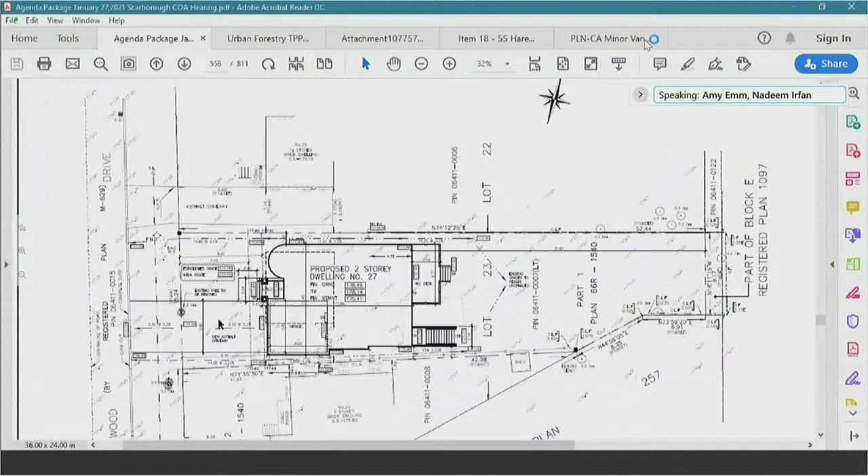Just zoom in the front porch area. Madam Chair, for item number 1, which is the balcony area, the permitted is 4 square meters, and we are proposing 5.95. I wanted to mention we have a ground floor porch, and the balcony is actually located right above it. So the additional square meter is based on the front porch.

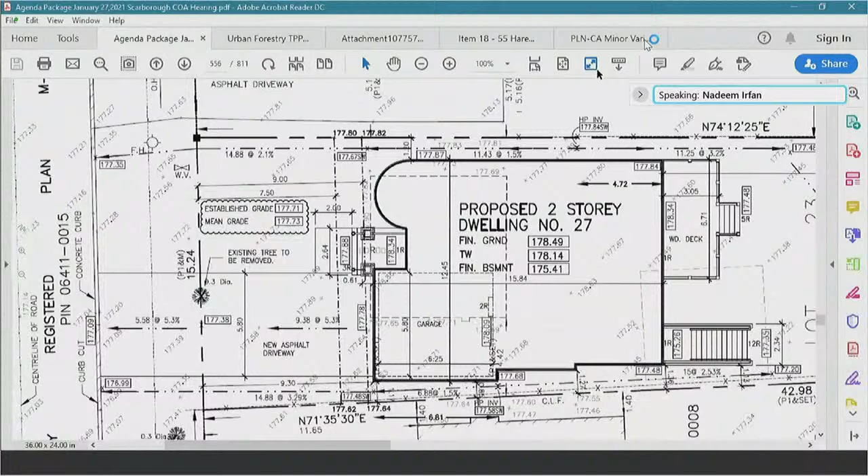We believe this is minor in nature and should be considered for approval. Item number 2 and 3 pertain to height. It was not our intention to request for the height. I think it's just 9.01 if we look at the front elevation, and 9.07. It's the way the zoning examiner interpreted it and listed as 2 variances. We believe these are very, very minor in nature and should be considered for approval.

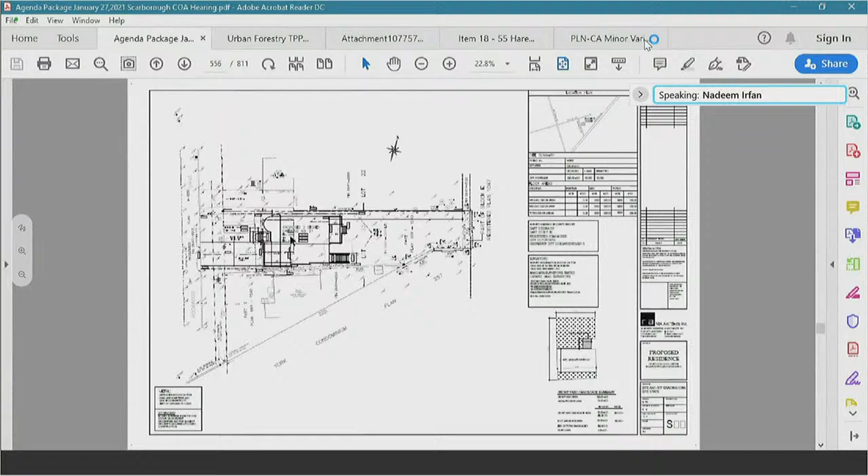Coming to the variance number 3, side yard. I wanted to go back to the site plan and zoom into the southwest corner of the garage, a little bit more, if possible. The dimension there is 1.17. The requirement is 1.2 meter.

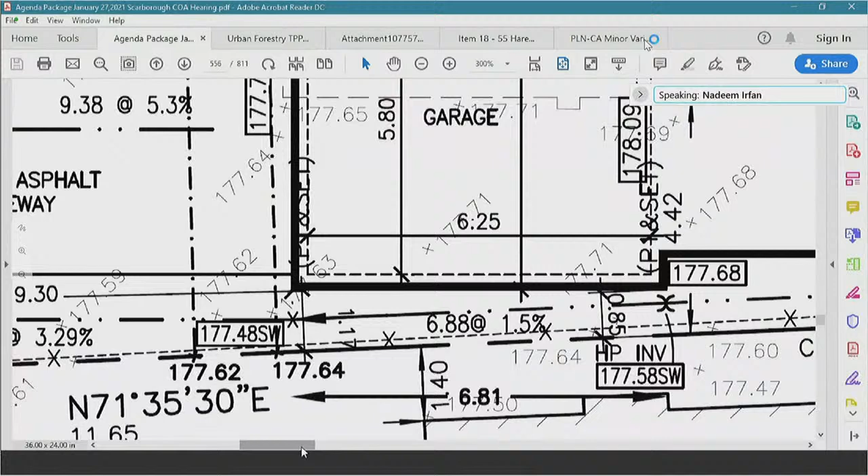The 0.85 is only at the corner of the property. If I may say, for the bylaw, exception 190 allows the garage to be built at 0.3 meter from the side lot line. So the ground floor complies or actually exceeds the bylaw requirement. We could build this wall at 0.3 meter from the property line, southern property line, and would comply with the bylaw requirement.

It is the second floor wall, which is only the back portion, that has the 0.85 meter setback. At the front, it's 1.17, half an inch, 1.25 inch shy of the bylaw requirement. If we were to stand in front of the house, the front wall on the north side will have 1.2 meter, and the front wall from the southern property line will have 1.17 meter. So it's basically negligible. The only portion, because the property line is angled, the second floor wall needs the variance of 0.35 meter. We believe that this is very minor in nature and should be considered for approval.

Going forward, item number 4 for FSI: the permitted is 0.4 times the lot area, and the proposed is 0.43. It's about 22 square meters, 22.8. If we divide the floor area into 2 levels, ground floor and second floor, it's 11.4. There is no variance for the coverage. There is no variance for the front yard.

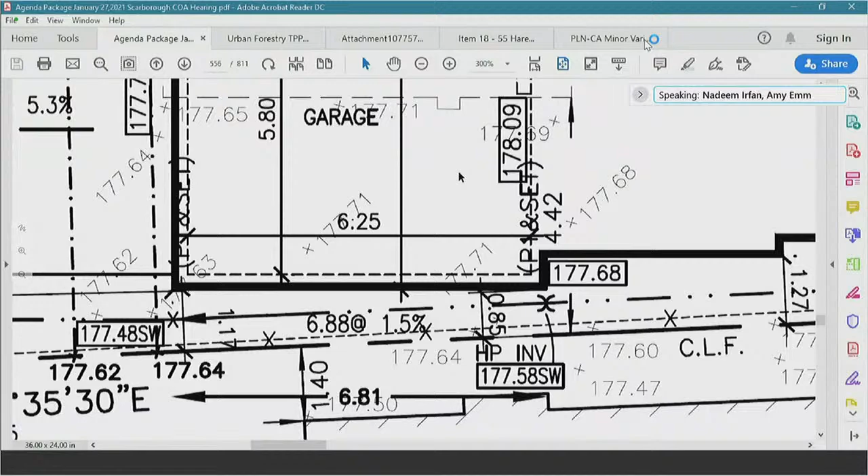Community planning staff have reviewed this application. They have no comments. Therefore, we request the committee to consider this for approval. And we conclude our presentation and open for any questions from the members.

Thank you, Nadeem, very helpful. Before I open it to the rest of my committee members, I recognize what you're saying about the side yard setback. My question is, if the committee chooses to approve a reduced side yard setback to 0.8, would you be agreeable for us to tie it to the site plan, to ensure that you're only putting that 0.8 relief where you have the garage component, and that you will not be expanding the rest of the dwelling to that 0.8? Would you be agreeable to that? Absolutely. Okay, thank you. Does anybody else on the committee have questions for Nadeem?

I see Mr. Saeed has his hand up. Go ahead, Muhammad.

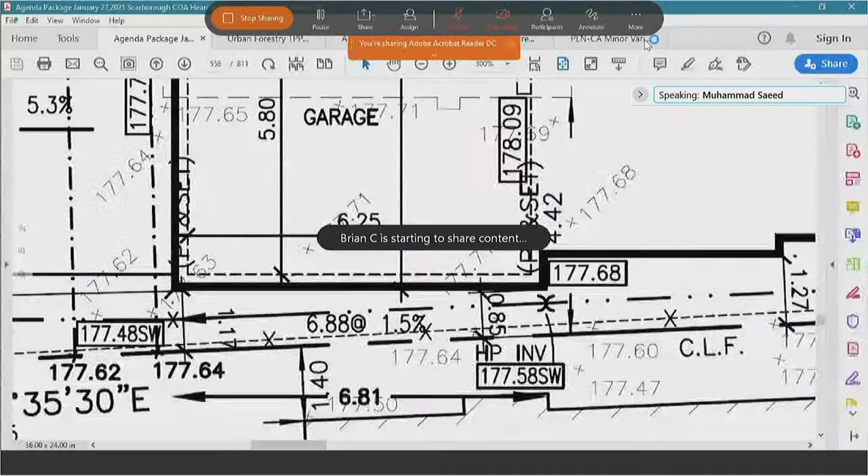Thank you, Madam Chair. Mr. Nadeem, this is just a clarification question - I could not follow you in the very beginning, I was looking at my notes. My question is about variance number 1. I just got your point that you were saying it's exceeding 4 square meters, almost 5.95, by 2 square meters. The reason you were giving was that there is a porch, and I think you told it's exactly the same size built over the porch, the second story. So, am I right on that?

Yes. Okay, so follow-up question - will there be a way to reduce this to the allowed limit, because it could raise some observations from the neighbors, like a privacy issue?

It can be reduced by just moving the front railing a little bit back, and it'll still serve as a balcony. But I'm not sure what we are going to achieve with that, because the main issue of privacy will still be there. Perhaps privacy is usually considered more in the backyard. That's why we decided to put the balcony at the front rather than at the back of the property, which is considered private area.

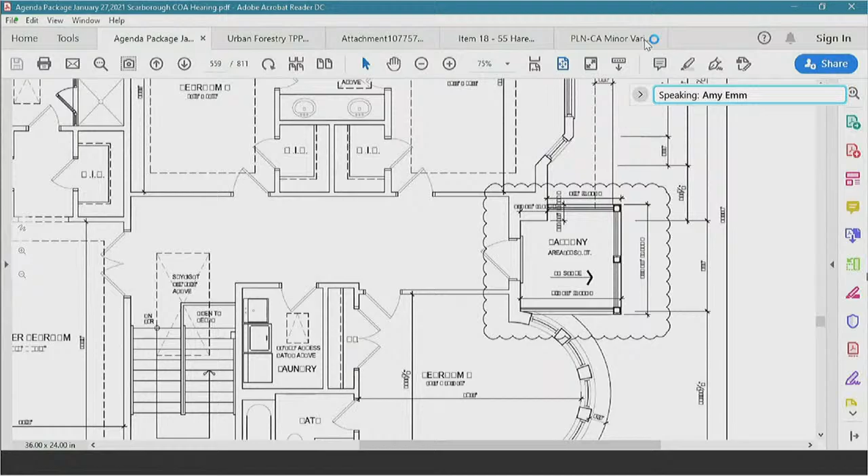Thank you very much. Thank you, Madam. If there's no other questions from the members for Nadeem, I'm going to move forward to opening the floor to the first public individual. Is there any further questions from Member Macaulay or Member McCaig? Okay, great. So Tom, please feel free to state your case, you have 5 minutes please.

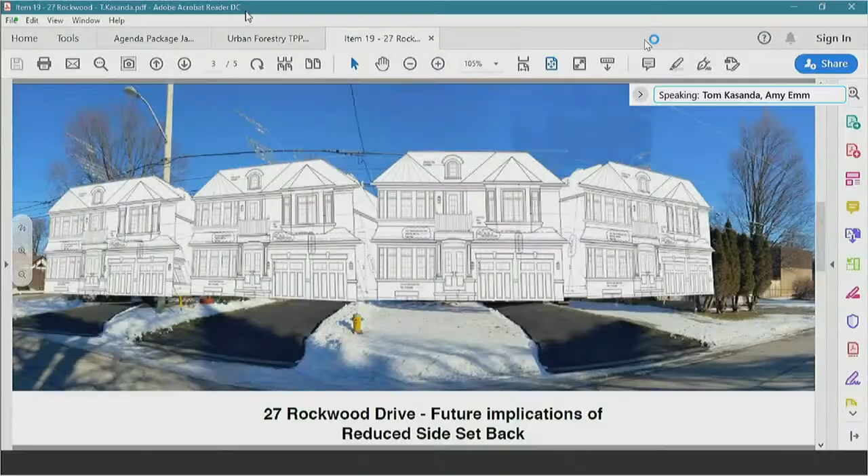Thank you, Tom. Does any member of committee have further questions for Tom? Okay, I see none. Let's move on to Suzanne, please.

Oh, hi. Yes, I'm just here because I'm a member of the Board of Directors for the York Condo Corporation, 257, and we share our back fence with 27 Rockwood. So our main concern was basically if they were going to be making any changes to the fence. And I'm not sure with the forestry what tree they were going to cut down, if it was the one in the front or the one in the back, because the tree in the back is extremely large and it has broken and fallen onto our property. So that was our concern, if they had any plans on removing the massive branches that have fallen onto our property.

Thank you, Suzanne. I'm going to defer your question to the applicant, Nadeem. Can you please address Suzanne's inquiry about the rear yard condition of the fence as well as the trees? It is not our intention to remove any trees other than the one at the front, just to make room for a car driveway. But at the back, I can inform the owners to clean up the broken tree branches.

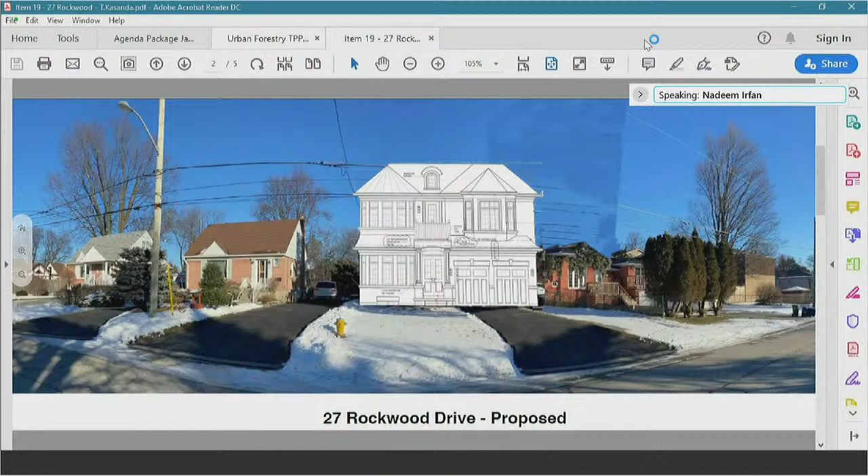Through the chair, do you wish to add anything? No, I think that addresses it. I don't see anything further unless we want to take it into committee.

Okay, so let's take this into committee then. Thank you everybody for contributing your comments.

Hi, Anne. Yes, you're still on mute. Thank you. I have moved my computer around so that I don't have as much of a background. Too much sun coming into my office, which is causing us problems in the morning.

However, the item I wanted to address now is to point out to the resident who had a concern that there is a condition of approval, which is submission of a complete application for a permit to injure or remove privately owned trees as per the City of Toronto Municipal Code. So in approval of this application and getting a building permit, the applicant will have to address both trees, the one in the front and the one in the rear. Hopefully that would resolve some of their issues. That's all my comments.

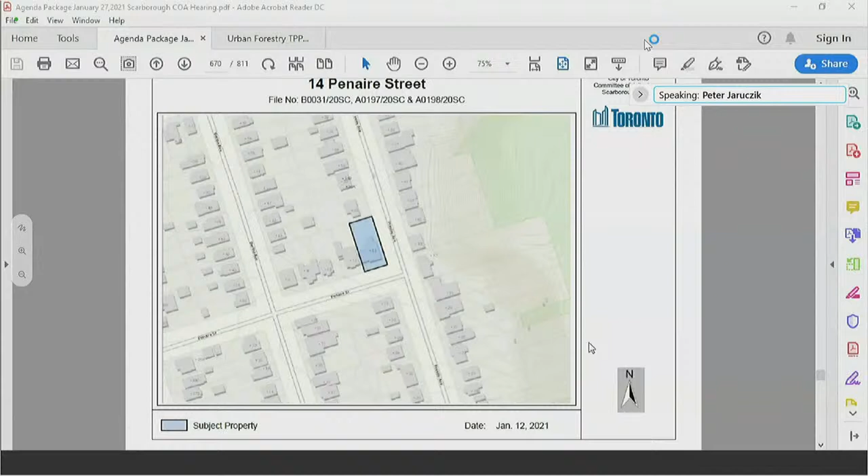The interesting thing about Penaire Street is we have 5 lots fronting onto Penaire in that lot fabric. The road to the north is Florence, with 6 lots fronting Florence. A street down, Dawnside, there are 6 lots fronting Dawnside in that same width of property. So it's my opinion this will not disrupt or take away the character of the community, as many of the lots follow this pattern.

So as we see here, Dawnside has 5 lots across, and across the street from those 5 lots are the ones severed at 25-foot lots. So when you look at the parcel fabric, there's already 5 lots previously approved there. We're in an area where Penaire has 5 lots, and on Florence, following that same pattern, we're again at 6 lots.

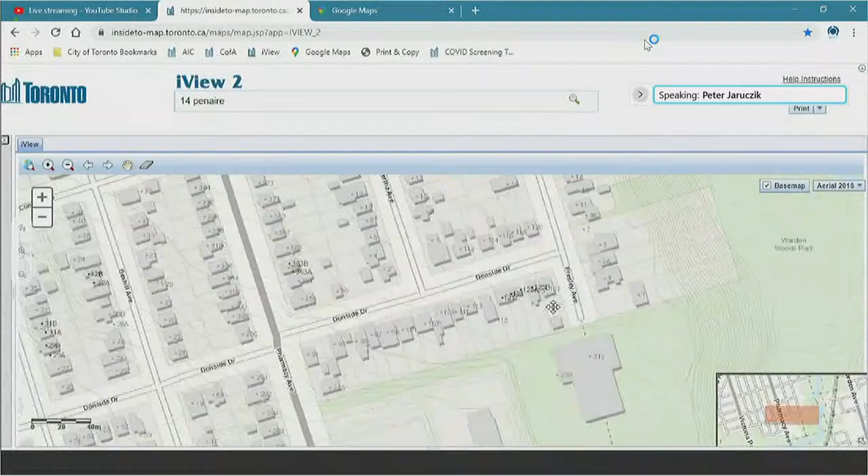What I want to end with is the last TLAB meeting regarding 50 Presley, just north of us. The member of TLAB concluded that only 3% of the houses in the study area will be candidates for severance, because the majority of the lots in the area are too small to produce two lots in the 25-foot range. Peter attested that it's about 9 to 10 lots in this neighborhood that are large enough to create these larger 25-foot severed lots.

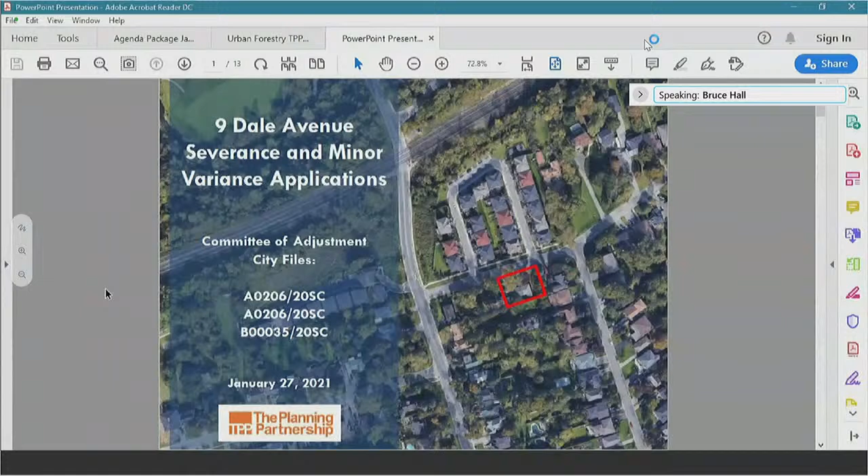My name is Bruce Hall. I'm a partner with the Planning Partnership, and I act on behalf of the owners of this property for these applications, a consent and 2 minor variances. Next slide please. Just to briefly fix you, we are north and east of Scarborough Golf Club Road in Scarborough Village, and south of the GO tracks. Largely a single family area, but as you can see, there is some intensification occurring in a few select projects. Next slide please.

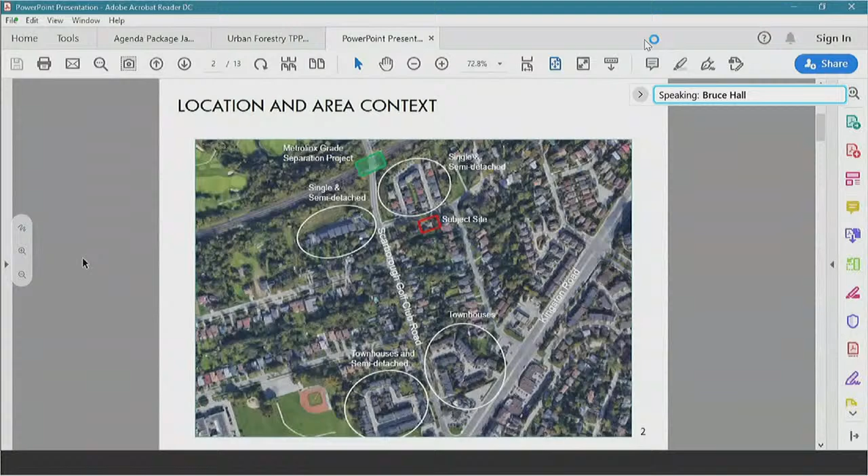Just in terms of some of the emerging context and character in the neighborhood, there's been a few things that have happened here over the last few years. There's some infill projects, townhouse on the west side of Scarborough Golf Club Road, and a semi and single detached development on a condominium road across the street. And as well, there's a grade separation project that Metrolinx is undertaking to rid Scarborough Golf Club Road of the level crossing.

Here's the existing site. I call it a wide shallow. It is 32 meters wide, 105 feet by about 21.4 meters. It has an existing single detached bungalow, which sits between 3 and 6 meters from the rear lot line, about 7.5 meters from the front lot line, and almost squarely in the middle of the site.

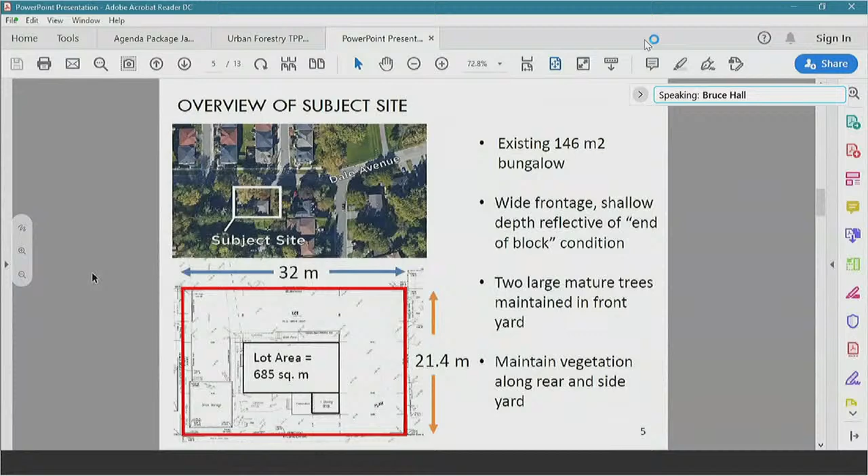Here's some of the existing vegetation, 2 very large mature maple trees in the front, which are being retained, and some existing vegetation along the side and rear yards. There is 1 tree to be removed, and I will deal with that in a moment.

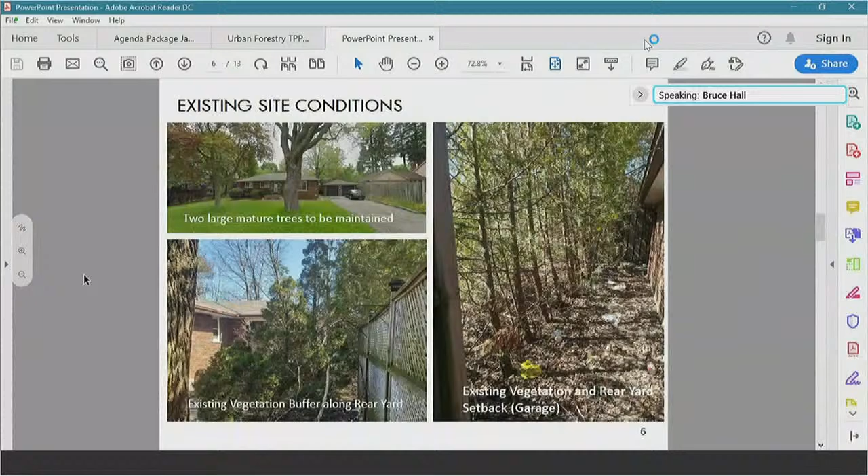Here are the proposed lots, and as you can see, it's proposed to divide it right down the middle. 16 meter frontages above the 15 meter requirement. The lots again are going to be placed almost squarely in the middle of the property. Now there will be a consistent almost 6 meter, 5.8 in fact, setback from the rear lot line instead of the jog. And it's been placed in the middle to allow for tree preservation and a tree preservation zone from these 2 large significant trees in the front yard. The existing vegetation along the side and rear will be maintained.

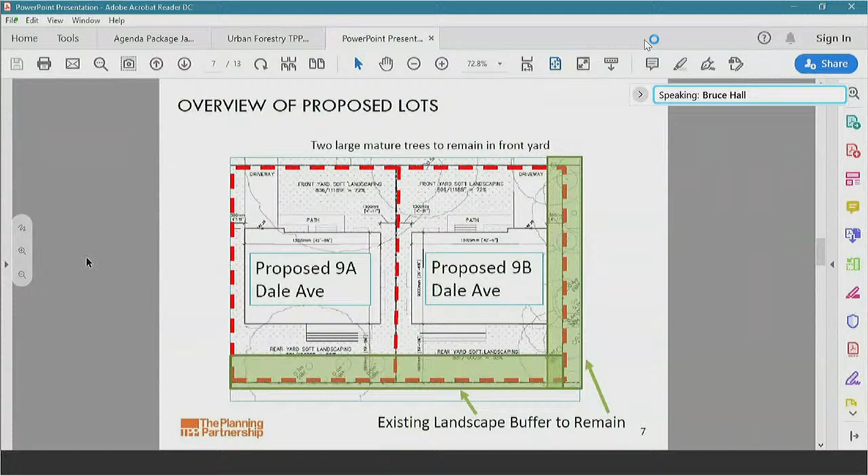I will go through the specifics in a second, but it's really a single detached dwelling, 16 meter frontage, consistent with the 1 to 2 story heights within the neighborhood, and a traditional kind of brick finish compatible with the neighborhood character.

In terms of the requested minor variance, the most important, I guess, is the lot area. The current zoning bylaw establishes a lot requirement, which is dated from when the existing area was developed. It doesn't really acknowledge some of the existing site-specific conditions around here in terms of this end of the block context and some of the change in character. The neighborhood policies do not require exact replication of the existing lot fabric, but rather something that is compatible and will generally fit in. In the existing neighborhood, there is a variety of lot frontages and lot sizes from 9 to 36 meters, and some lots that are larger and some that are smaller. With a 16 meter frontage and a 343 square meter lot, we feel it will fit within that existing range.

I will deal with the lot coverage and FSI at the same time. We're going from 33 to 35 for the coverage and 60 to 63% for FSI. The purpose of the bylaw is really to establish a suitable relationship between the house and the lot and the coverage. We think it maintains this. It still has adequate separation, amenity and landscaping, and that relationship is appropriate.

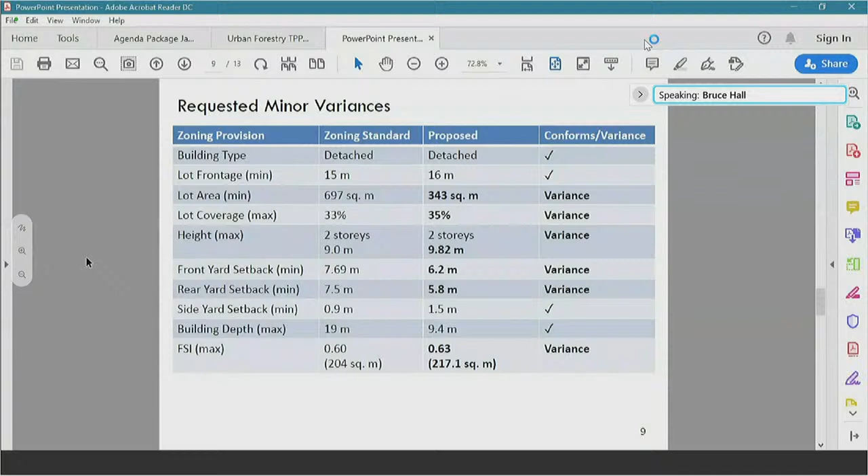This was very helpful. I would now request the committee members, if there's any questions for Bruce at this time. We also have a resident who's going to be speaking. Any questions at this time? Okay, I see none. Thank you, Bruce.

We share 100 foot of the entire property boundary. So I just want to say, first of all, that we wish, this is a major project that's going right next to our house, which will have a significant impact to us. I wish the owner and developer would have consulted us rather than acting as if the neighbors did not exist. So we had troubles.

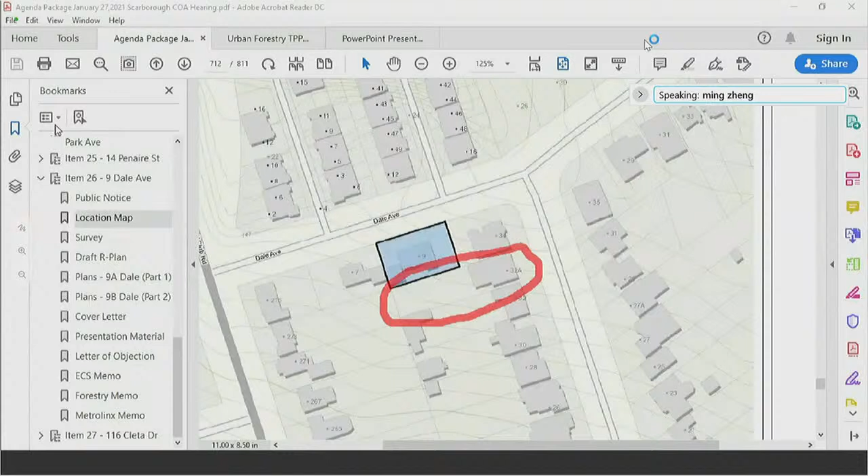We expressed in the letter that we had troubles with the tenants living in the house, noise, loud parties, garbage overflow to our side, because there's no physical boundary. I mean, there's no fence, just some trees. So we have problems. In the past, we have communicated with them, but didn't really get better.

So now we're really concerned. In terms of these several variances, we have the greatest concern with variance number 1, which is the minimum lot size, by chopping it into half. This is, I think, not a minor variance by any standards, whether numerical or whatever.

The applicant has expressed in the cover letter the mixed style of the neighborhood, but without really mentioning that this lot is unique in the sense that while it does have a 100-foot frontage, it is particularly shallow. A 70 foot lot is particularly shallow. The lots on these neighborhoods, on Dale's and the immediate streets, are typically between 150 to 200.

Even the townhouses in Kinglands and on the next block, by the way, those townhouses are not mixed in the neighborhood. They're separate developments by themselves. So the neighborhood actually has a pretty unique and consistent style, look, character by itself. And we don't really have, within several blocks walking distance, this kind of severed lots kind of projects.

How much time? Oh, okay. Am I limited in time to my response as well? No, I was just checking the time. That's okay, sorry, I will try to be efficient. It's perfect.

I will say that the view we're seeing here is a 90-degree view. The new houses will not have any direct facing windows, they will be perpendicular to one another. The east wall of 9B Dale will have no side windows. It's a blank sidewall in order to ensure privacy. The bylaw requires a 0.9 meter setback; it's going to be set back 1.5 meters.

With respect to the existing dwelling, you can see there's a corner which the existing dwelling juts out. The new dwelling will be pushed back further north and go further east. If a new dwelling were being constructed on this lot as it exists today, they could build to within a meter and a half of the lot line under the bylaw, so it wouldn't be a dramatic difference from what's proposed. I would think any new development would also likely have a similar approach to the rear yard setback.

This lot is 21 meters deep. You cannot meet both the existing bylaw front yard and rear yard setbacks and develop any sort of viable house at about 18 feet deep on this property. Even the existing house does not meet the bylaw with respect to rear yard setbacks.

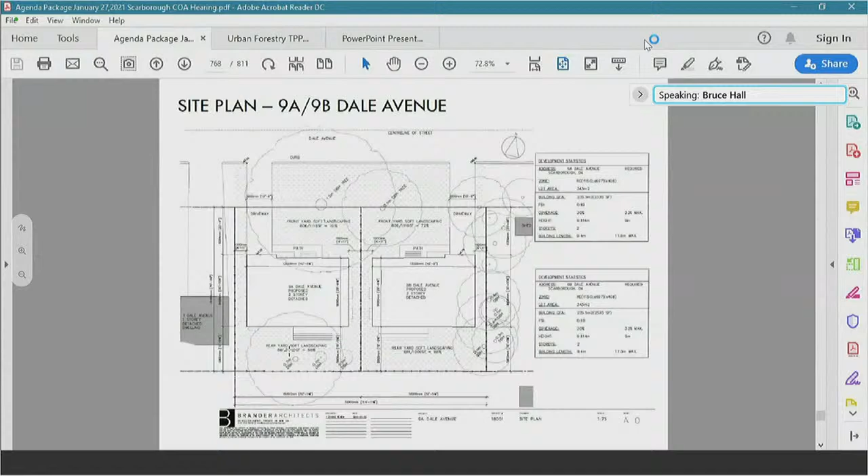There's a proposal for a fence. I'm not sure whether it shows on here, but that's certainly something that my client will do. I think that's enough on that.

With respect to the trees, in terms of the arborist report, it does not distinguish when it says 'injure' whether a tree is going to be removed or maintained. There are 3 trees that are in fact going to be removed, at the southwest corner of the property, basically where the garage exists today. There's one very large tree, a Siberian elm, the largest tree. It is in very poor condition — it has grown out of an existing slab and sits between the garage.

The other two trees are of significantly smaller caliper, and they are cedars, in fair to poor condition. The primary focus is maintaining some of the existing shrubs and cedars along the property line, which provide a buffer.

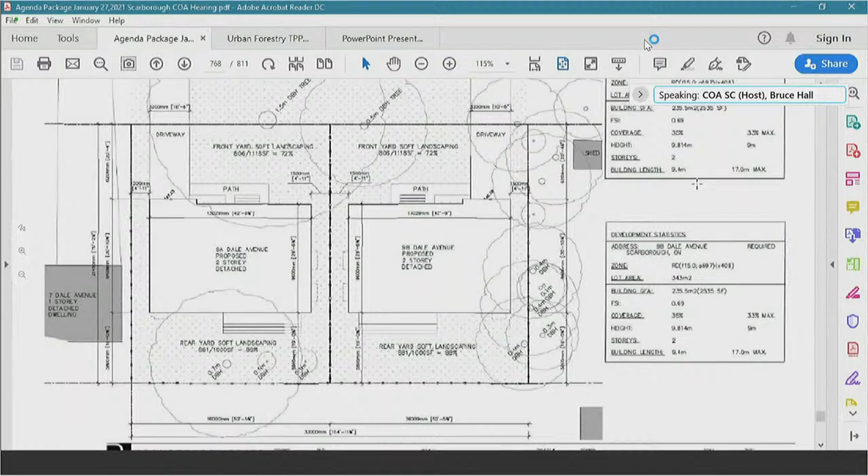Appreciate that. All right, Brian, can we have the screen back up? So at this time, members of the committee, any questions for Bruce? No question? Okay, all right. Well, thank you, Bruce, for your time.

Appreciate that. Before we go into committee, any comments to wrap up? Bruce? No, I am good, thank you. Appreciate that, thank you. So committee members, there are no questions or comments for Bruce at this time, so we take the matter into committee.

And please, any comment, any deliberation? Member Emm? Thank you, Madam Chair. So in general, I do appreciate that this will be a change from what currently is on the south side of Dale Avenue.

But I do agree with Mr. Hall that you can see there is a mix of types of built form in this community of various different intensities, and this could definitely be an appropriate transition between a more dense built form, such as the townhouses to the north, as well as further to the south.

That being said, these are still going to be single detached homes. It's not like it's going to a semi or townhouse configuration. There is still very generous side yards being provided, more than the bylaw requires. And so, like Mr. Hall said, even if they were not to go after a severance and just rebuild this house, they could rebuild much closer to

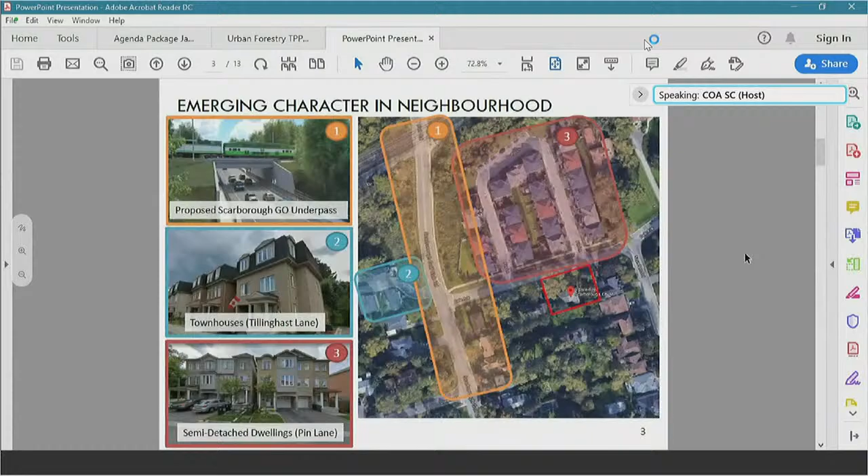Okay, if I can just jump in - Mohammed, you had some reservations, appreciate that, you had a concern with the variance. Member Emm, you had your comments, we heard Member Macaulay. Brian, can I see the screen? Sorry about that, all right. So I think we had a good discussion. I'm prepared for a motion at this time.

It's 3 o'clock, we need a motion. Member Macaulay, go ahead. Okay, I have to unmute. I recommend approval of the consent and variance applications as submitted, subject to the conditions that have been included in our reports. And note that there's also a tree preservation condition.

Okay, so we have a condition from Urban Forestry, we have conditions from Metrolinx, we probably have standard conditions of consent, and we also have - just want to check, there are advisory comments from Engineering Services. Okay, there are no particular conditions there. Okay, thank you. All right, so we have a motion on the floor to approve the application.

May I have a seconder, Member Emm? I'll second that motion. All in favor of this motion? All opposed? Okay, Member Said opposes the motion. The motion is carried. The applications have been approved subject to conditions. Thank you, thank you Madam Chair.